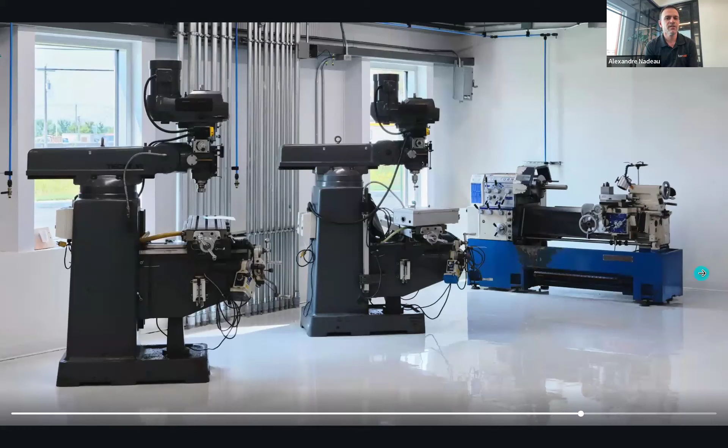But as time passed by, we were given opportunities to develop technology for other patents that had in common that they were all being invented at Boucherville's Institute of the NRC. So I think what we have in common is a highly diversified company with NRC Boucherville inventions. This is what we are.

Why do we still have 4? Because I think we've really believed in all of them. When I took over management in 2016, we decided to keep them and reinvent them, redesign them, rebrand the company. And the first 5 years was really establishing products that are industrial, not only meant or tuned for early adopters or innovators, but meant for the industry.

So there's not a chronological image set, but we'll start from the left. As you see there, that's the Accuraspray. It's our 4th division. Of course, Luke knows this one very well. He basically pioneered the whole thing in the 90s and was with us for 20 more years. The Accuraspray now is going to reach its 1,000th sensor in the industry. And now having diagnostic is not a curiosity, it's a must in the thermal spray industry.

It is a true repository of the intellectual property that really matters, which is what's out of your gun. People are building their IP with what the Accuraspray measures. We're super proud to have coupled that to the cold spray industry with the CS.

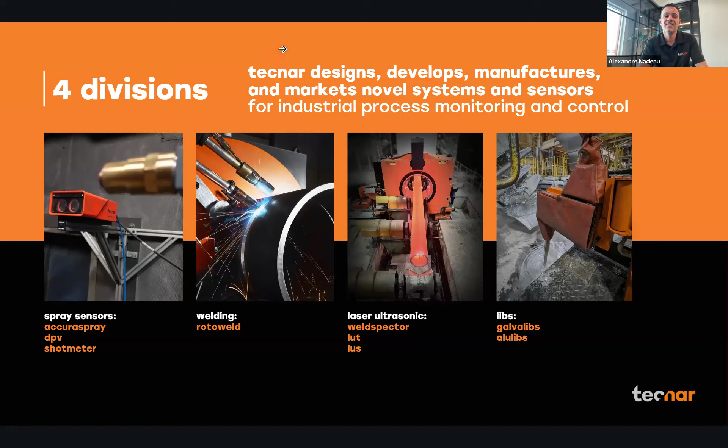Why do we show this one? It's because it's our main repeat business in which we have a segment, and we have a strategy to become #1 because we're basically more accurate, we're safer, and we're friendlier and more versatile for being installed in many different places of the plants, small diameters, very large diameters. So laser UT is quite an adventure, and there's actually a bright future for laser UT in the inspection of cold spray additive structures, and Luke will talk about that.

Then finally on the right, we do also chemistry by lasers, which is LIBS, laser-induced breakdown spectroscopy. We have not invented that, and what NRC invented is a trick, a nice little trick that they've patented to apply LIBS to molten metal chemistry monitoring. We now have about 50 systems in continuous galvanizing lines, and we're currently opening up the market to molten aluminum, namely the secondary market of ingots and casters, where using recycled material is key to be profitable, and having a continuous reading matters much more than just using physical samples every couple hours.

So today's future for Tecnar, before I leave, is to use all this data that we've been providing. Even the RotoWeld has a camera, and we use the data of our systems to replace expertise that's harder and harder to get.

The Rotoweld already has that. It welds now all by itself. The Galvalibs on the far right will, by the end of this year, replace the galvanizing engineer by deciding itself what to put next, what ingot category to put next in the bath.

The LUT for seamless pipes is going to decide which plug is good or bad for doing the piercing, for example, and the Accuraspray should, by the end of this year, decide itself what is the right spray parameter based on an AI loop with lab results. So the goal for the future at Tecnar is to build value on our data, and cold spray is definitely a vibrant field in which we're looking to be present too.

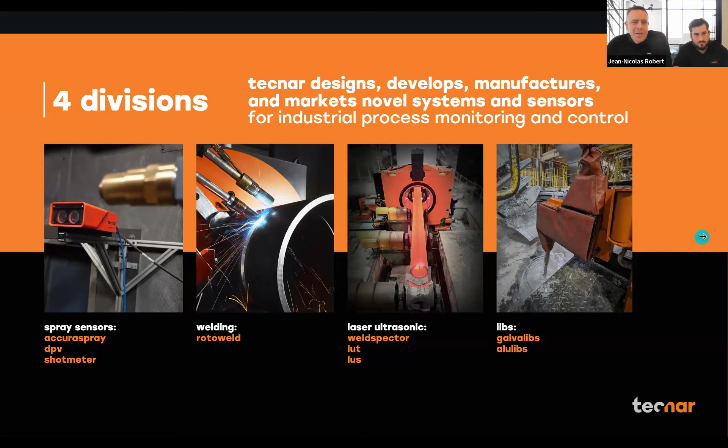Thank you very much. Awesome. Thanks, Alex. Yeah, you're kind of stealing my thunder there, but that's fine. We'll speak about that at the end of this presentation, but thanks. You're the boss after all.

So here's a deep dive. I just wanted to take a minute to, again, dive deeper into our spray sensor division. There are some products that you guys on this call already know. Just a couple of updates as far as our products are concerned. The cold spray meter that some of you know about or even use on a daily basis is now being replaced by our DPV with a laser option.

Again, more robust. So we'll still maintain our service with JF's team from a service management standpoint. We'll still maintain service on the cold spray meter, but we're phasing out that product and focusing our efforts on the DPV. And as far as our production units are concerned, yes, we're celebrating our 1,000th Accuraspray in the market, and our lead time on that unit, by the way, is 1 week. We invested a lot in our production lines.

Very proud of that. And the Accuraspray CS, fairly new to the market, but there's a dozen of you on this call right now that are using it, that purchased the unit over the last year or two. Going very well. I also wanted to show you the shot meter. It might not be as well known, but the shot meter was previously exclusively distributed by Progressive Surface. And now we also sell it direct. So we're going to be participating in a few shot peening trade shows over the year and start being more aggressive in that industry.

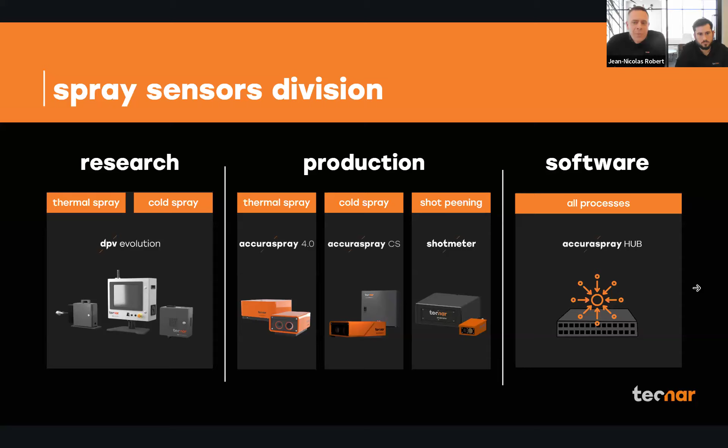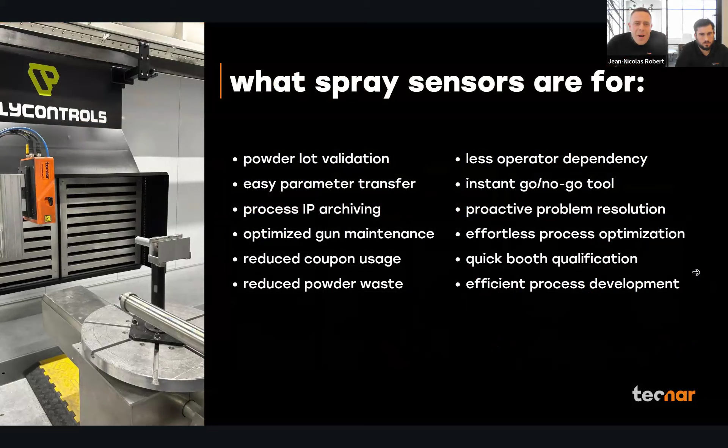And before I pass it over to JF, I just wanted to put there a quick reminder of what sensors are used for. There are many reasons why you need to have a sensor. Our belief, as Alex said, is that every spray booth, thermal or cold or peening, in the world should be equipped with a sensor. So I'm going to quote Vic, who we all know well, who told us once that our Accuraspray is the poor man's Doppler, and he's right. We work hard so that it's not that expensive, but we also work pretty hard to make sure that it was also easy to use, reliable, and repeatable. So that's what JF's going to talk to us about, introducing in more granular detail our DPV with the laser option, and then our Accuraspray CS, what they do and how they operate.

Yeah, thank you, JN. So I'm going to be starting with the DPV here. The DPV is a pioneer in the space of in-flight particle monitoring. It was developed jointly with the NRC. As Alex said, we're very close to them. The DPV can measure temperature, velocity, individual particle size distribution, but it can also come equipped with a laser to allow for cold spray characterization.

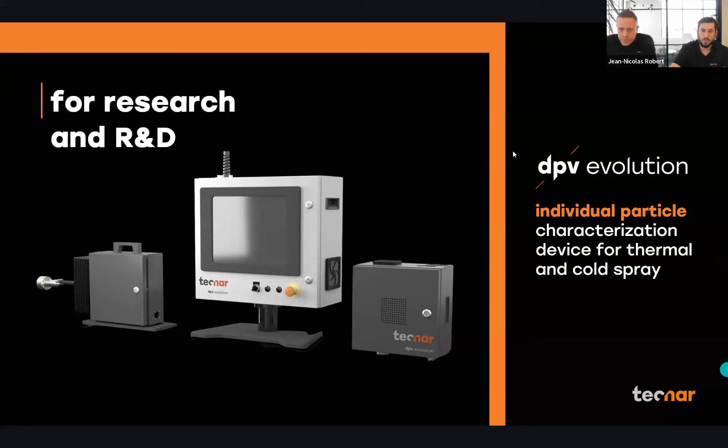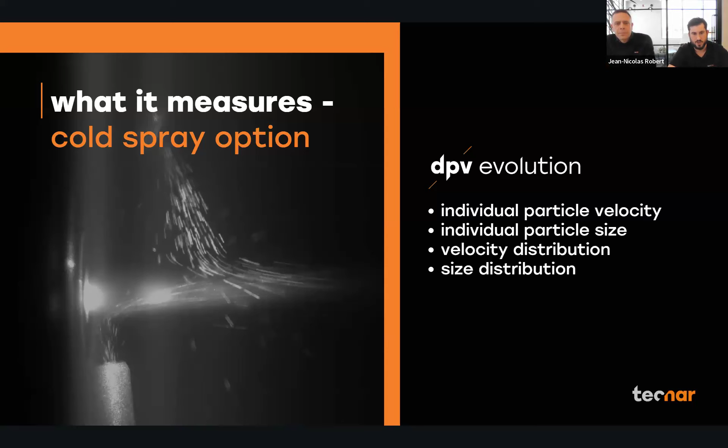So while measuring those different readings, the DPV does the individual particle velocity and individual particle size with the use of what we call the mass technology. And we also developed something that we call the scanning unit, which really allows you to do a cross-sectional analysis of the plume. The goal of the DPV is to be able to grab granular information and in-depth detail of your plume across the entire geometry.

So like I said, it's easy to use. The software allows you to separate certain areas of the plume and really do a deep dive. It's been used since early 2000. It's referenced in many articles and scientific papers, many of which are on our website. So I invite you to have a look at that.

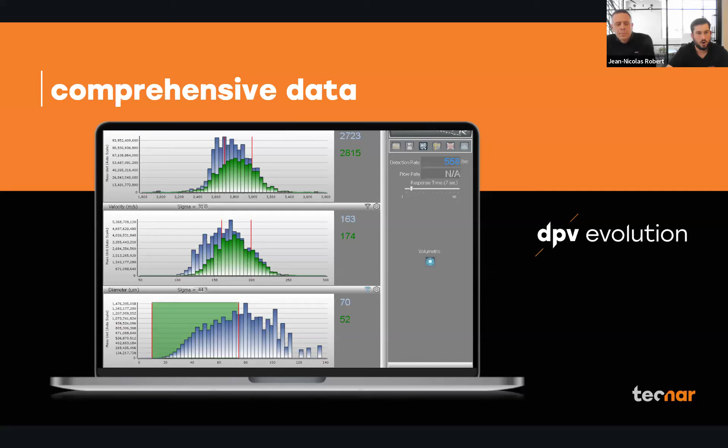Now talking about the CS. The CS is like a mix of all that experience that we gathered throughout the years measuring thermal spray and cold spray with the DPV, but with the ease of use of the Accuraspray, which is now in its fourth generation. So we took that deep knowledge and understanding of the plume, mixed it with that easy to use, easy to integrate, robust, intuitive technology that is the Accuraspray, and we got the Accuraspray CS.

The Accuraspray CS works with an optical system. We did many tests, and we believe that an optical system is a lot more robust and reliable than a camera-based technology.

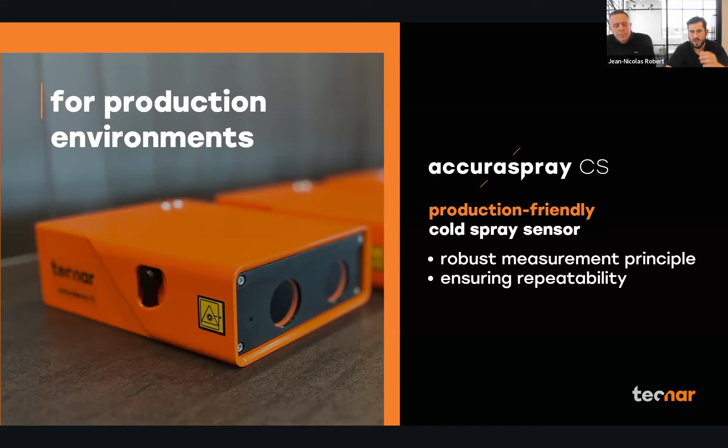So just a little funny anecdote. Recently, I was talking with a new customer of the Accuraspray CS. He read the quick setup guide. We had a short call, 2 minutes, and he told me, hey, look at that. It works just like magic. Got velocity just by pointing it at the plume. So that's very nice to hear coming from the industry.

So with the Accuraspray, once you get that quick setup guide, just aim it at the plume, you get your velocity. You can do relative feed rate, in-flight particle velocity, substrate temperature.

And finally, at Tecnar, we believe in the strength of software. So we put a lot of effort into software engineering, into gathering the feedback of the industry, of the end user of our technology, and put it as fast and as good as we can within our technology. So we work continuously to put that feedback into our sensors.

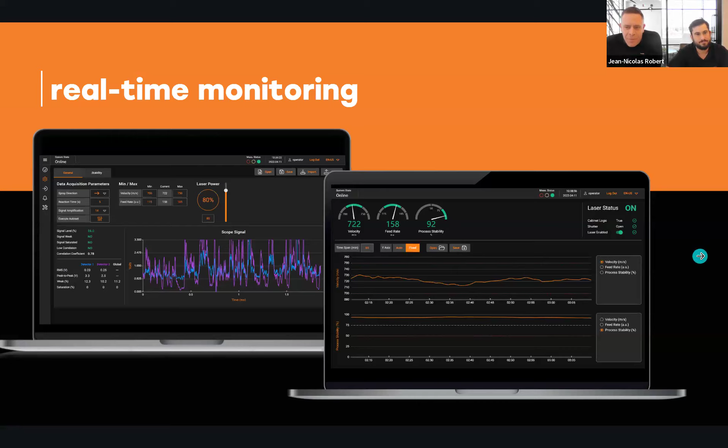Thanks. Awesome. Thank you, sir. And JF is our service manager, by the way. So if you have an issue or anything or positive feedback, JF is your man here at Tecnar. So now's the time, Luc, sending it over to you guys so that you can introduce us to your company and your technology and how you use ours.

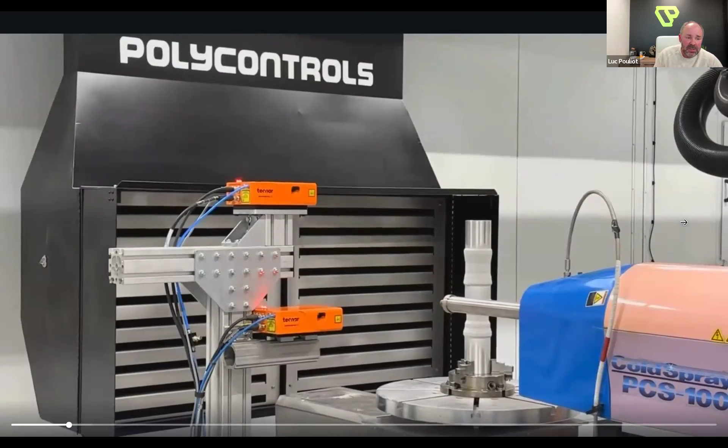Thank you, Jean-Nicolas. So my name is Luc Pouliot. As Alex said, I've been with Tecnar about 23 years actually, before deciding to become an entrepreneur 6 years ago. This is when I joined Polycontrols. And the objective today, apart from introducing the company a little bit, is to show you how those nice and reliable sensors can be not only integrated smoothly in an industrial platform, but also trusted.

So what we're seeing here, not much is moving at the moment. It's basically a setup that will allow us to directly compare two identical sensor heads manufactured and calibrated by Tecnar, in the same booth, the same day, with the same gun, the same operator, without even stopping the cold spray gun in between the two measurements.

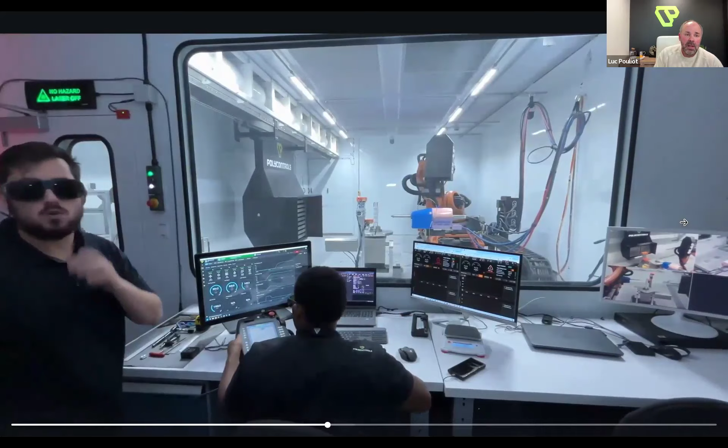Allow me to insist, for any type of diagnostic tools that you might want to use, on the importance of the setup. So defining or designing a way to ensure reproducible placement. This is absolutely critical so that you can compare apples to apples over time.

What you're looking at now is basically our Smart CSAM 5.0 Industry 5.0 platform. So starting the gun, tuning parameters, upstream parameters, until a point where all the dials will be to the green, and the powder feeder will be told to start spraying.

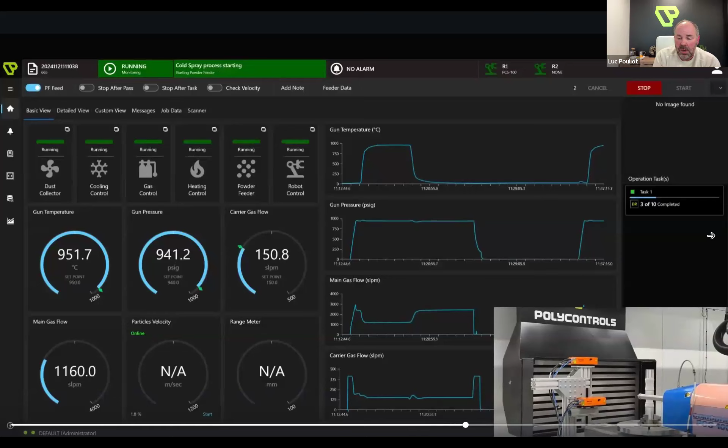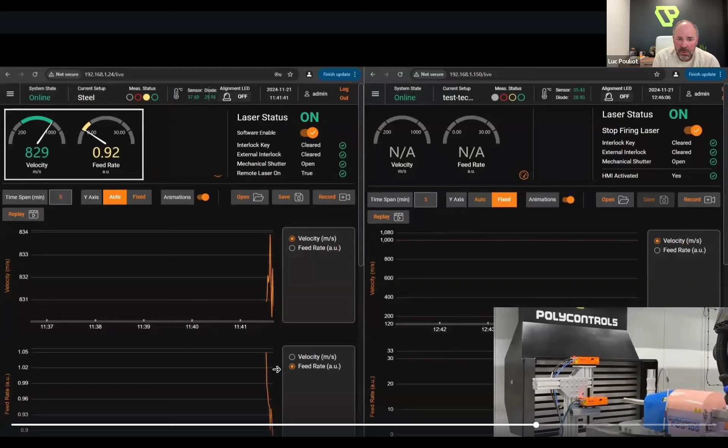So what you're going to witness first is the gun moving towards the bottom sensor head. This will happen pretty soon, actually. I think this is now. And so on the left-hand side, you see the Tecnar interface, smoothly integrated, velocity of 830 or so meters per second is detected very rapidly.

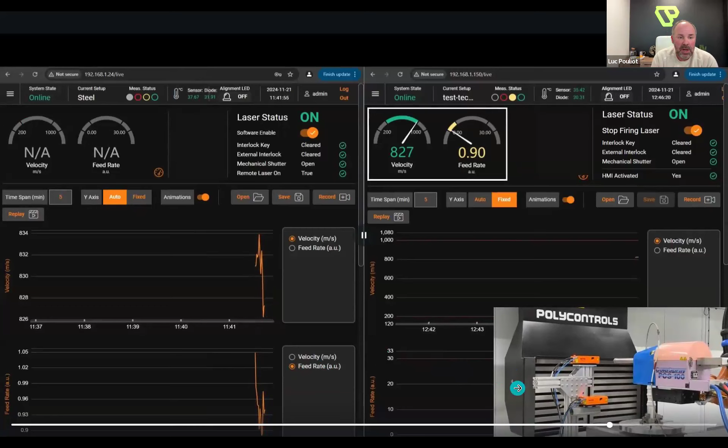Now the gun is asked to move at the same standoff to the second. This is a close-up towards the second sensor head. We're going to switch back to the right-hand side of the screen, where we can confirm easily that the velocity is 825, 827, so well within the precision of that kind of measurement.

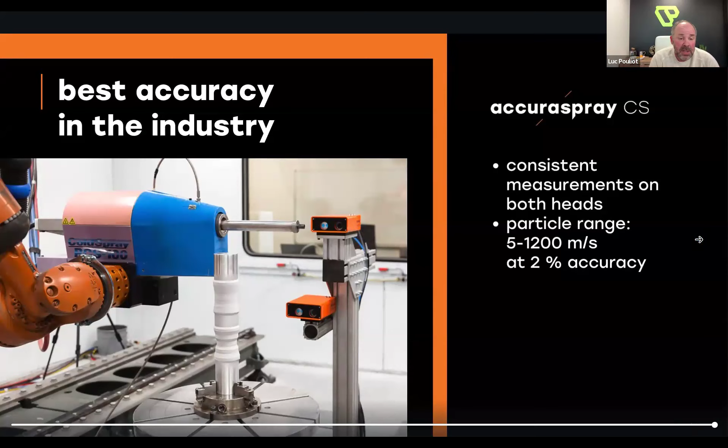So we have done that several times for several sensor heads, and definitely we're happy to confirm that those sensor heads are direct replacements, meaning that if one is sent for calibration and you have another one, you can actually just replace it temporarily, or if you buy a second, third, or fourth one because you have more spray booths or you want to monitor from different angles, they will yield the same results regardless of the serial number.

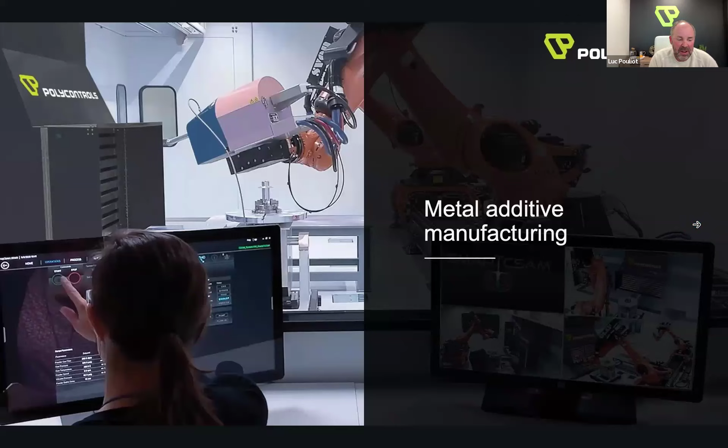Next slide, please. So at Polycontrols, maybe some of you attended North American Cold Spray last September. So we have this pretty large cold spray or CSAM facility that you partially see on screen. So metal additive manufacturing in general is definitely a core focus and a core business. Next slide, please. The company is more than 40 years in business, about 40 employees.

What you see on screen is our mission, and I want to emphasize the fact that we strongly believe in sustainability, and it comes into play even when we select the processes we want to work with. So there are reasons why we select some and reject others, not only for the performance, but also for their compatibility with circular economy, with the sustainability aspect of the process and the way we operate.

Next slide, please. So the company has 3 business units. On the left-hand side, it's about instrumentation. So we have a service calibration lab. We calibrate mass flow meters for liquid and gas, all types of them, thermal mass, Coriolis, and others. About 2,000 a year, up to the highest standards of the industry within ISO 17025 standards.

Not only do we calibrate those, but we also have the expertise to integrate those types of devices to create gas conditioning systems. What I mean by that is it could be gas mixers, pressurizing units, gas separators. So whatever custom fluid management system you might need, it's part of our expertise.

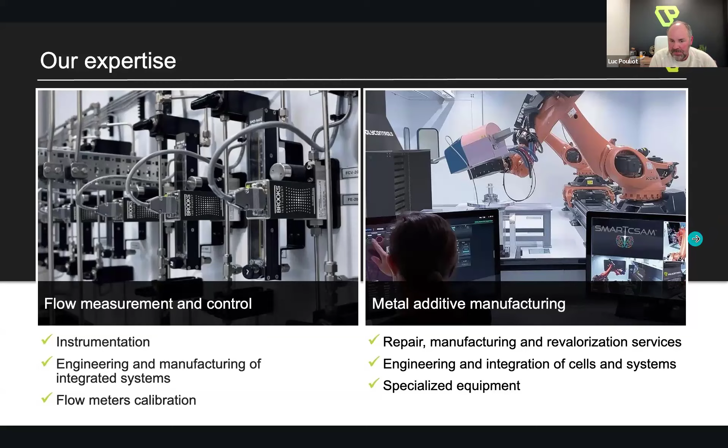Next slide. So you won't be surprised if I say that cold spray is a kinetic energy based process. Therefore, being able to measure, control and adjust the spray particle velocity is critical. That is why we use and strongly believe in those sensors. I will hand over. No, please come back. I will hand over to Fernanda to maybe give a testimonial about her daily use.

Yeah, hi everyone. My name is Fernanda Caio, and I'm lucky enough to work every day in this nice facility that you've been seeing in the videos and in the photos. So here, what we do every day is cold spray, and I would say we couldn't do that without using the sensors and measuring the velocity every time. So we pretty much use the Accuraspray CS for every spray run, before, after spray, just as a sanity check or to verify that everything is going okay, and it's a very quick and easy response. If something is not quite well, we will know right away by checking the velocity.

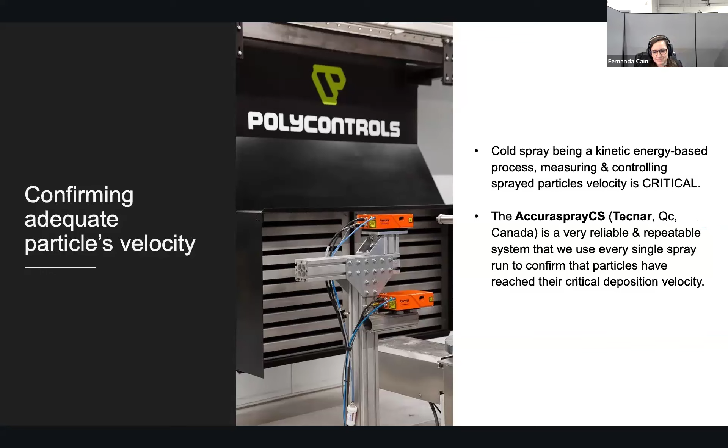I can go for next slide. I think Luc is back.

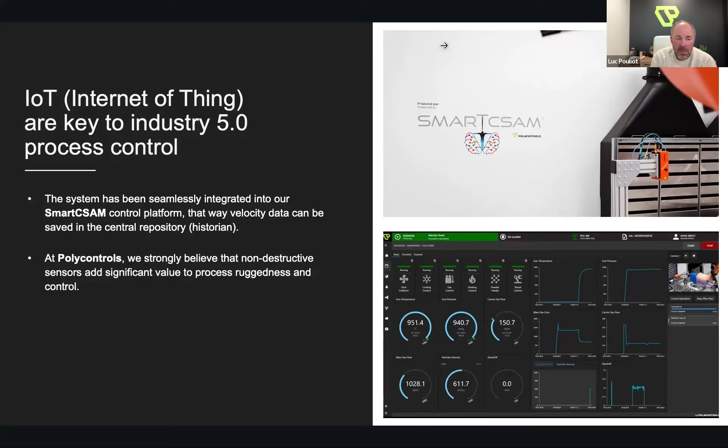So beyond, of course, the Accuraspray CS, we at Polycontrols are strong believers that sensors of various sorts, especially non-contact, non-destructive sensors, are really part of the solution for not only robust process control, but a more clever and efficient use of material. There's nothing worse than spraying too much powder and wasting some more in the exhaust system, or even worse, having to strip off or remove too much material.

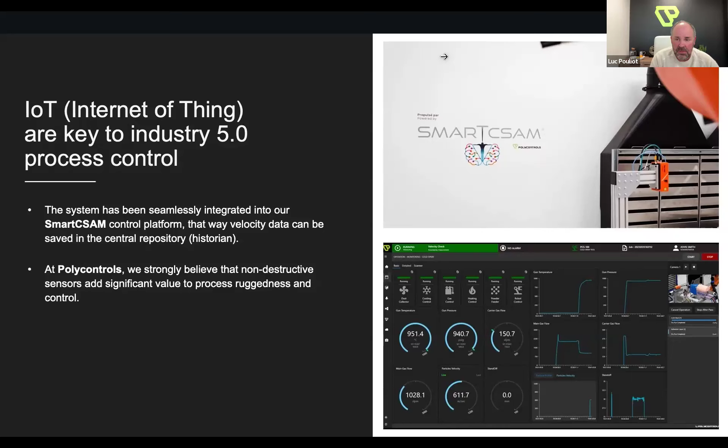So a lot in our SmartCSAM operating platform is related to various types of sensors, and this is what we're going to discuss in the next couple slides. So one technology we're currently integrating is based on laser ultrasonics. I won't give you a course about laser ultrasonics. We could be here for a long time, but the fundamentals are very similar to conventional ultrasounds.

This means we need to generate a sound wave. The big difference is what kind of hammer you use. In the case of conventional ultrasonics, you're going to use a mechanical transducer and sometimes some coupling media, and you're actually going to touch the part. Here, the idea is to find a way to obtain similar information without touching the part. That way you are quite independent from part temperature, part movement, or even part geometry.

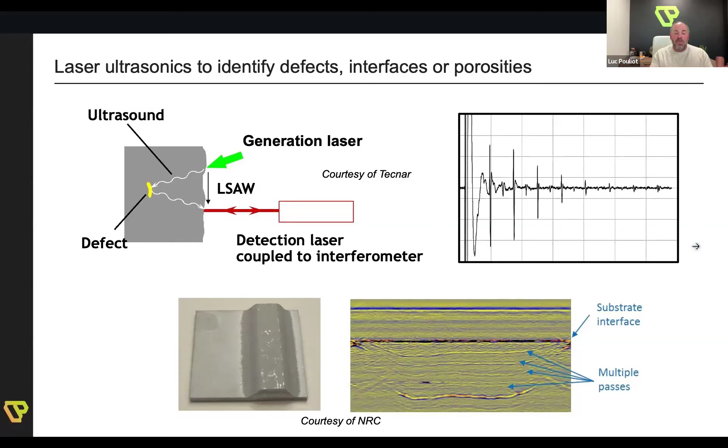To conclude on that technique, it can even do much better in terms of resolution. Theoretically, it can sense a difference on the order of one interatomic distance, but that would be overkill anyway for cold spray. So we're integrating that as we speak in the Smart CSAM platform.

Another very important aspect, and again, it won't be new to you, is the control of standoff. Standoff distance is a critical parameter. So another thing we implemented is an automatic standoff control based on the interface between the robot and the sensor, to keep standoff the same comfortably within half a millimeter precision.

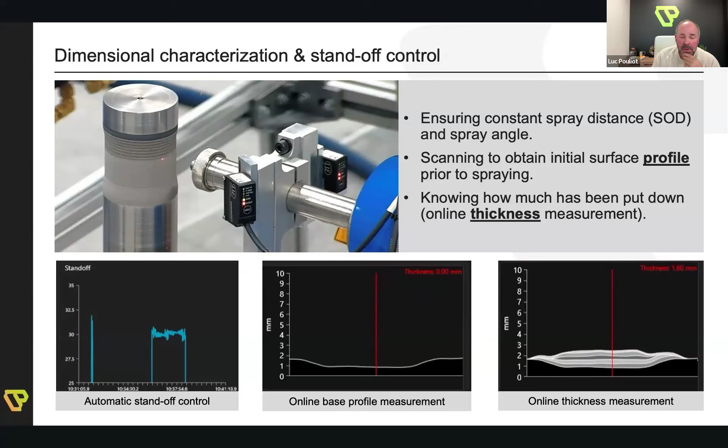Next slide, please. And last slide, actually.

And now we're going to integrate that into the Smart CSAM platform. Infrared imaging, obviously, not only for part temperature, but also to see how heat is distributed in different areas, because it can explain some differences in the thickness of the buildup, even though the gun is moving in front of the part in a uniform manner. The very last one, I was not allowed to show what we have now in pictures and graphs, but we're also looking at acoustic devices to monitor nozzle state.

So the idea here was to give you a feel for how much is available out there, including the Tecnar sensors, to actually help you converge faster towards ideal spray parameters, detect problems way before they are actually a real problem or issue, so minimize the waste. I won't go through all the list that Jean-Nicolas showed on screen, but this is really a reality and it works.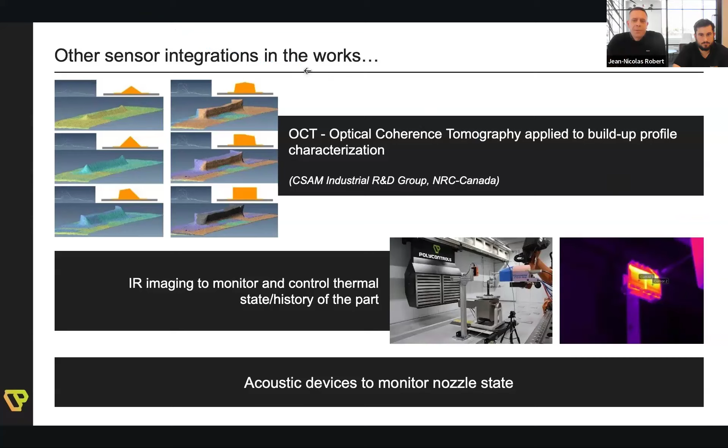Awesome. Look, we gave you 15 minutes thinking you were going to take 30. So this is great. We're going to have more time for questions. Actually, Aaron, I got 3 questions already. I can answer them. I think we got them through the different forums when people were signing up. I don't know who they're from though, but I'll answer them.

So there was one question about particle size and what technology does what. Well, I think we pretty much answered this question in our presentation. There's one thing I want to point out though: even though we split research and production, we see more and more academic clients and research centers that will go to our AccuraSpray series instead of our more granular and precise, I would say, DPV technology.

And the reason why that is, well, there's budget first and foremost, but there's also the potential of then exporting those R&D projects into the industry world. So we see that more and more because those AccuraSprays and those shot meters are the ones that will be used in production environments. So we see more and more academic clients going to the production tools first.

The second question I had was about AI and if we're interested in getting some AI partners. The answer is always yes. You know how to find us. We'll leave our coordinates at the end of this presentation, but for sure, as Alex was saying earlier, Tecnar is slowly but surely moving into almost like a software company. We've got a team of software engineers and data scientists here in the office. And for sure, any help or any joint venture that you guys want to propose our way, we'll always be listening.

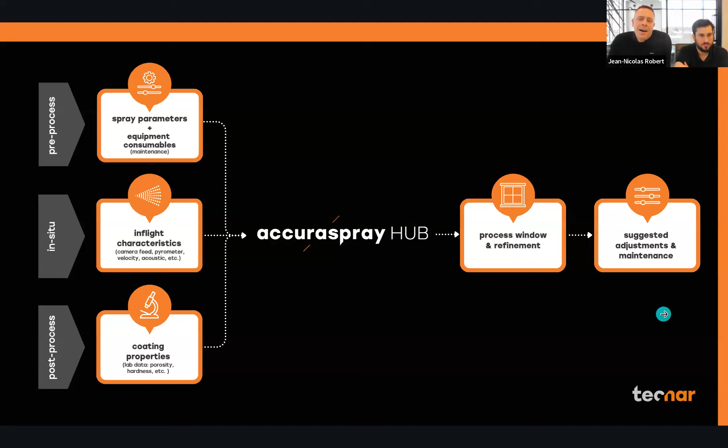And as we're going right now through a learning phase, our first and foremost objective with this hub is really to define what the industry has always struggled to define, which is the exact process window, what's your own IP. Sometimes we realize some of our clients don't even know what their own IP is, so we help them use data to realize what that is and refine it. Ultimately, maybe it's utopia, but we're working on it. The ultimate goal, as Alex was saying, would be suggesting adjustments and maybe one day doing automated adjustments.

So the hub really allows us to come up with all different ranges of analysis based on lab results, ultimately correlating with different things at the end. I can't wait. That's the only two slides I can show for now, but there's a lot going on.